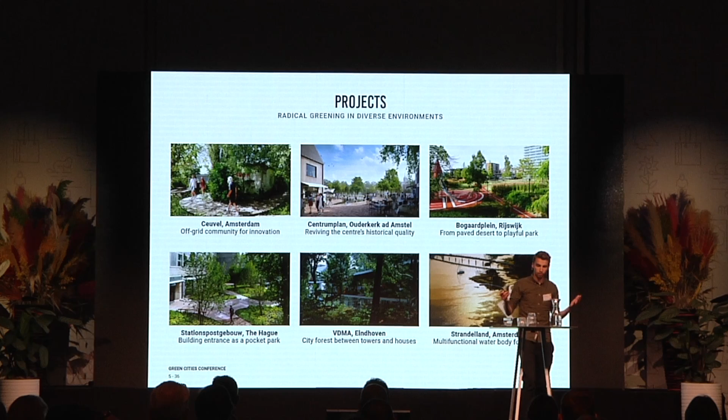We do this in a variety of scales, mostly in the Netherlands and Belgium, and we're exploring a bit further towards London and Germany. For instance, De Ceuvel, one of the first projects that we did, went a bit viral after it was executed, because the vegetation planted there also purifies the soil underneath. Since it was a former shipyard, it was very polluted. We're now in year 8 of that project, where Wageningen University and the University of Ghent are doing research on how much the soil pollution has been reduced since the start.

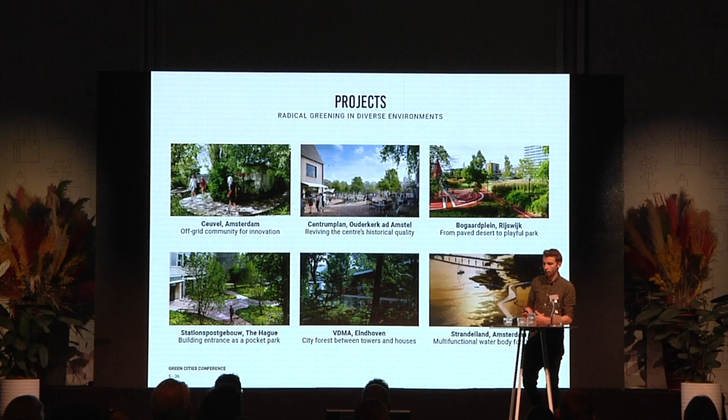Also in The Hague, the bottom left one, we made a very small pocket park, but with multi-layered planting, really a cooling spot in one of the most paved spaces of the city. And in Bogaardplein, on top, in Rijswijk, we try to really create a new city center, a social city center for play, for activity, for sports, for improving the physical health of the inhabitants within a park setting.

And as mentioned, because we try to tackle these assignments like this, we became Architect of the Year, which was a bit surprising because we're landscape architects by nature. It was a very nice celebration, but far more important, we think, it was also a sign that as a country, as a society, we're ready to really take green as the most important part and then do all the rest, or take green as a problem solver for all the other challenges that we're facing.

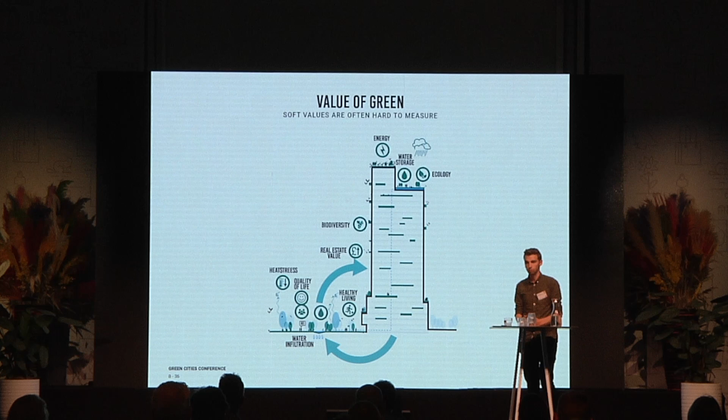And I think almost every speaker talked already about the value of green. We know it's super important, but the difficulty about it is that those values are quite soft, so they are difficult to measure. Today we saw some nice examples where it has been measured, which is really good, but we really need to start making and executing the examples that can also prove that it really works, that people can experience what effect green, water, and natural environment have on your life, on the quality of life, and also what effect it has, of course, on the biodiversity itself.

So the first one I want to present is a question that came to us, I think, almost 2 years ago, like, hey, we have this open landscape just southwest of Lisse, which is in the middle of the Bollenstreek, the tulip area in the Netherlands, and we want to build 450 houses in it. And we were like, just building 450 houses in a location which is not that well connected with public transportation and everything. If you see how the urban fabric looks on the right side, it's also not the type of neighborhoods that we should create anymore in the 21st century.

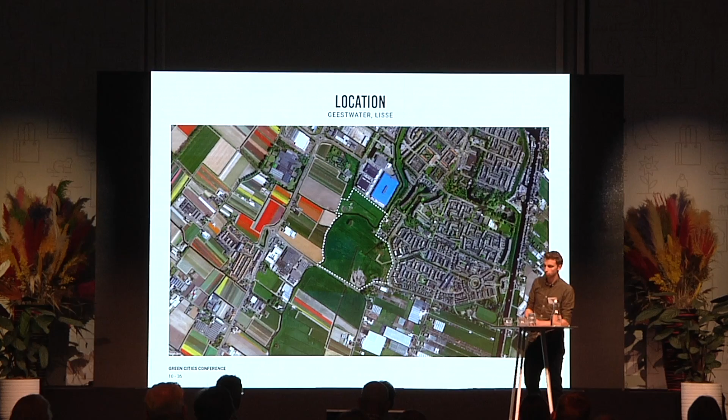So then we started looking at where the space came from, what the identity of the space used to be. And it turned out that it was actually a part of the Haarlemmermeer, which is now a big polder, but used to be a lake. It's the area where Schiphol, the big airport, is situated. And it had a bit of an extension towards our area. So it always used to be a wet area, a lake, a swamp later, and then later on a polder.

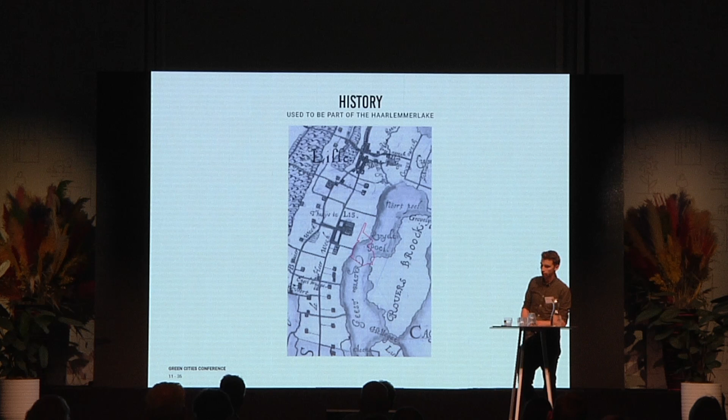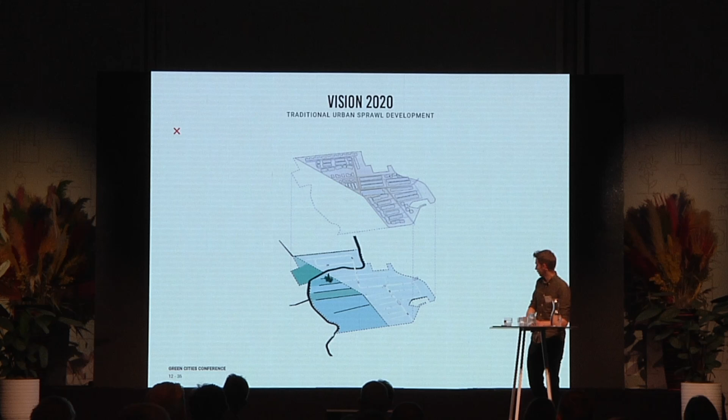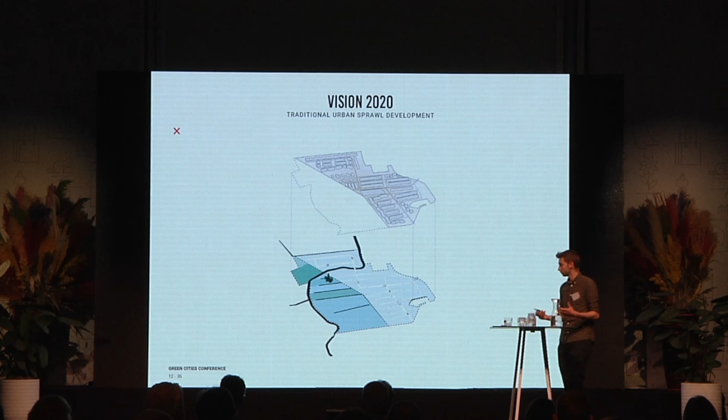And that inspired us to take this plan that was made already before, which we got, and we thought, this is not the way to go. You have a lot of streets. You have no interaction or very little interaction with green and nature. It also didn't consider the left part of the site, which we weren't allowed to build on, but just stayed like an open, grassy polder with very little value for biodiversity and nature.

And then we thought, let's transform it, and let's start from the soil, from the existing, from the history, and bring back that water landscape so that you get a very varied landscape and open space with wetlands, with more forested areas that also interact very strongly with the urban fabric that we designed. And by using some strategies, like not making huge individual gardens, but smaller gardens or outdoor terrace spaces, freeing up that space for a larger collective landscape, and stacking functions. So for instance, more apartments and less ground-mounted houses, but also sometimes parking underneath the built houses.

And maybe there are private developers in the audience, and they will think, shit, that's really expensive to do. It also is. So it was a huge challenge, but we also had ways of reducing the costs. For instance, by really minimizing the infrastructure. In the plan now, we have only 40% of road infrastructure. We don't have underground rainwater sewage because the water just flows off over the public realm towards the water landscape. And by making a very compact and intimate urban fabric, they also need to do less preloading and that kind of stuff. So that led to a plan with way more space for nature, for water, for recreation, and of course also for the quality of life.

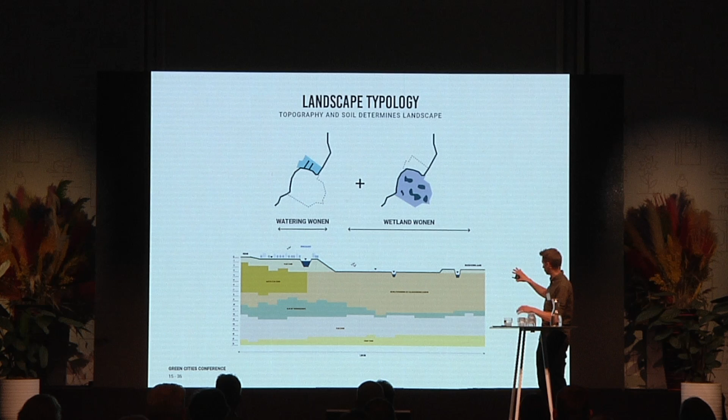And we have two different areas within the plan, because the right one was always part of the ancient, historical lake. The left one was never part of it, and that's also why it's way higher, and why it's also not part of the same polder structure. And therefore it also asked for a different approach.

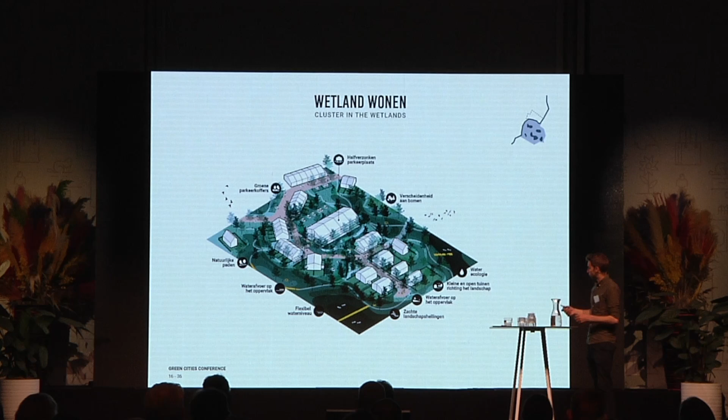So in the biggest zone, in the wetland living as we called it, you have these compact clusters where we made neighborhoods of between 40 and 60 houses, because that's a good mass or a good number where everyone knows the neighbor also. So it's also trying to enforce the social value. And then you see the blue-green fingers that surround actually this island almost completely.

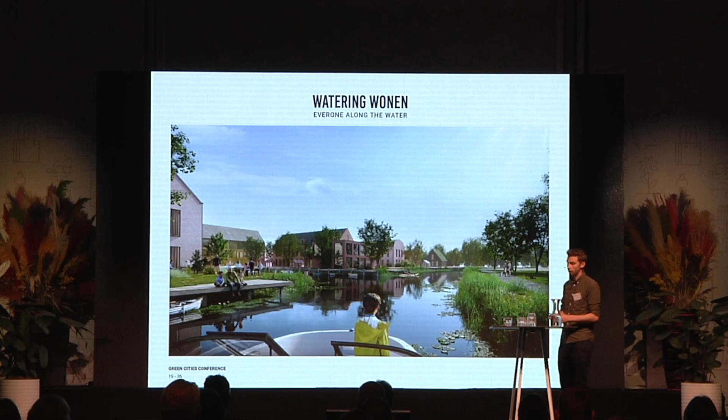And that's an image of how we hope, of course, it's gonna look in a few years. I think construction will start in an extra 2 years, so we're really now in the technical design phase to bring that further. On the northern part, we have a bit more of a traditional layout and setup. We also had to please the developers somehow, but still by extending the existing canal and waterway and softening the edges and everything, and also foreseeing the park zone on the south along the water.

There has been a huge investment and an extra increase in nature. And this is the plan, how it looks in total. So you see how these 450 homes, we have the same amount of housing here as there was in the traditional plan, but we have almost 12 hectares of extra water landscape as an added value.

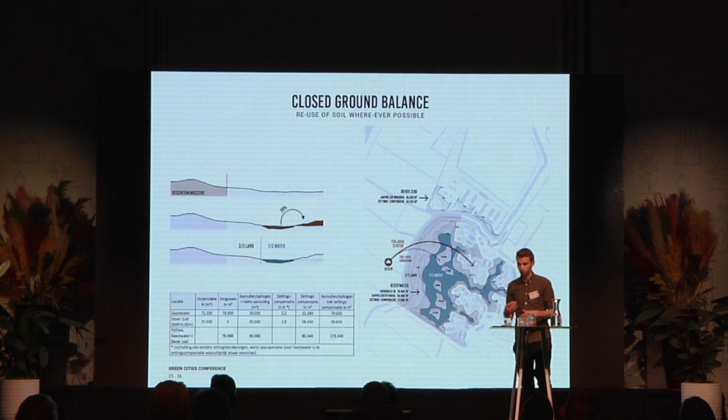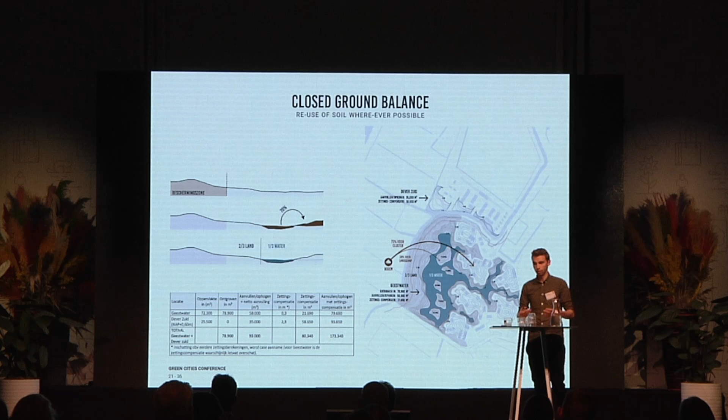And then, of course, you need to start working with engineers, with policymakers to also get this done. And also, it was not only about creating nature and creating a nice living environment, but also being very sustainable with how we deal with soil. For instance, that you don't have to excavate everything and then bring everything away and import new soil again. So that was calculated through.

We also talked with water authorities, because the water management in the Netherlands is very unnatural, actually. Often you have in the summer a higher water level than you have in winter. So we talked to them and we asked, can we turn this around? What should we do to do that? So we have an agreement that for this part we turn it around, which of course helps the nature flourish.

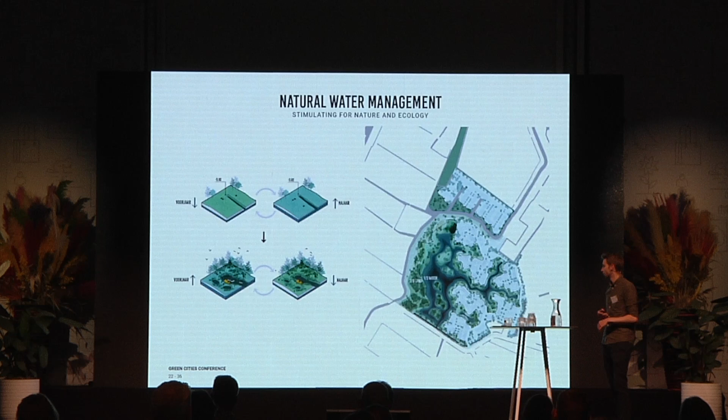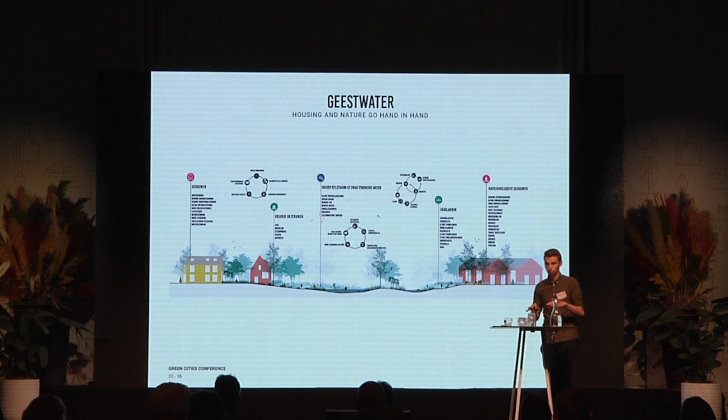And then with our ecologists, we looked at what species should we bring, where can we make habitats for animals to live, and how can we combine and connect all these different landscape qualities, the wetlands, the more forested areas, the grassy meadows, together, so that they form one ecosystem.

And so maybe as a summary, the fact that we need to do way less sand depletion because our clusters are way more compact, that we have less infrastructure, so less roads and not that underground water drainage and everything, and that we get a slightly higher revenue from some of the houses because they have such an amazing view over that landscape. We saved around 2 million euros.

So that money was invested in those more expensive strategies, like making smaller gardens, putting the parking underneath. But in general, that led to freeing up this space for 12 hectares of wetland landscape. And that's, of course, the big win of this whole project.

And then Middelkerke, it's along the Belgian coast. I'm originally also from Belgium, and I've spent a lot of summers along the coast. But it's not a coast that you can be very proud of as a Belgian, because somehow we managed during the 20th century to get rid of our whole dune landscape and all the dune formations and just pave them over, make a concrete dike, and build a huge line of apartments against it. The joke is that if sea level rises, Belgium will be protected by all the apartments standing on the dike.

And then there's one very specific building, the casino on the beach, and it has a small square in front, and it's really on the beach, so it's in front of that dike. And so there we got the question, hey, we're thinking of making a team with architects, and we also need a landscape architect to design the square. And we were like, the program of a casino is maybe also not the most socially inclusive program. The square in front, it's a nice assignment in general, but can't we do something more with it?

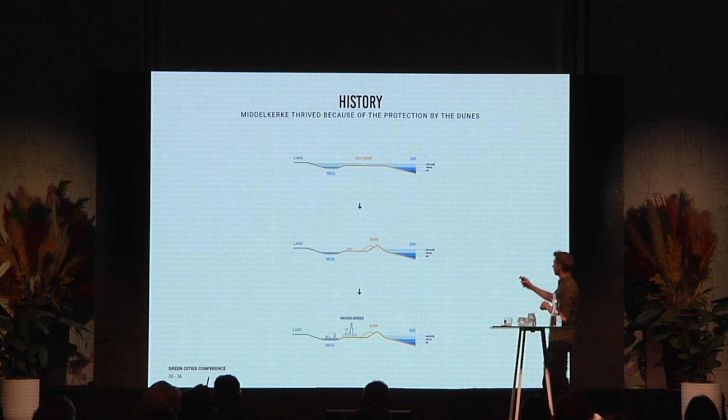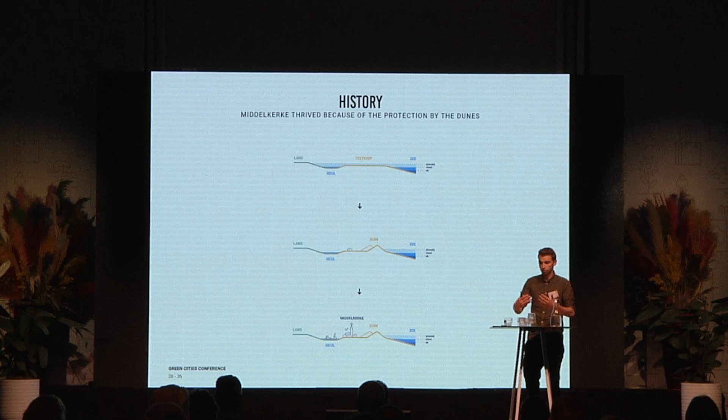And as you see through time, it was actually like one of the Wadden Islands in the north of the Netherlands. It was this very tidal area with this sand island that sometimes flooded over and sometimes not. And then during evolution, of course, a dune formation formed itself, and that made it possible that a settlement, like a fishers' village, emerged there, behind the dune formation, because it was protected from the sea. And that allowed Middelkerke to thrive and to become the village that it is today.

And then we thought, well, this casino is so much of a barrier between the sea and the land and the whole village. Can't we bring that back? Because there was also a question to reinforce the dike because sea levels are rising, can't we use this building that we need to make as a means to create more landscape, to bring that dune landscape back, but also to reinforce the dike at once?

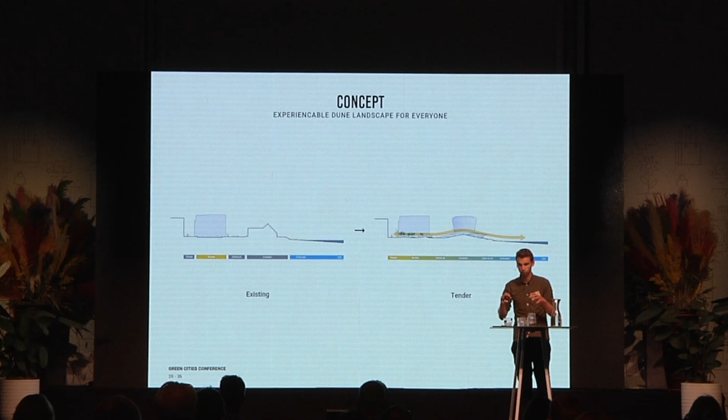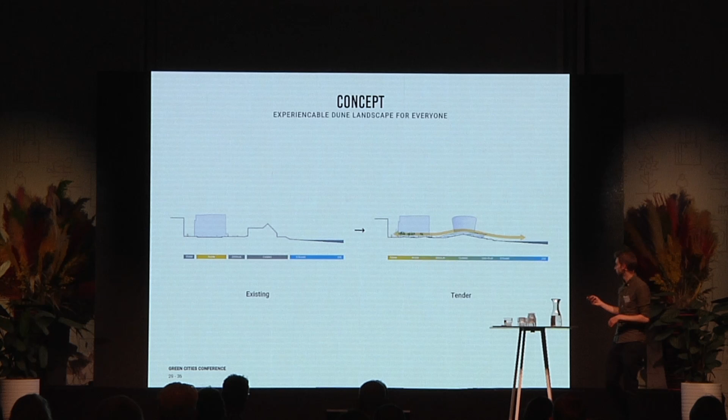So we learned from what was there, from the dune formation, and we proposed the building as a dune formation itself. The casino doesn't need that much daylight because you want to keep the people in and keep them playing. So we put it underground in the dike itself, and then draped the dune landscape over. And then there's a small circular volume on top, which is a hotel, and that did need daylight. But this is the ambition there.

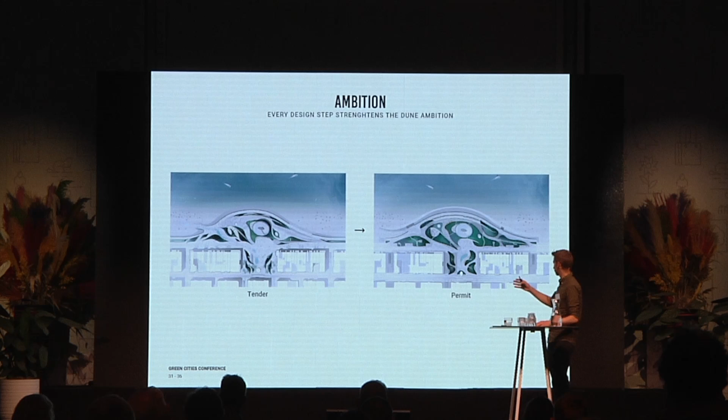So you see that the building is half sunken in, and you have actually a very slight, generous wave of dunes going over and bringing you to the beach and to the seaside. And from the tender proposal, which you see on the left, until the permit, which has been agreed upon right now, you see that this first ambition that we had was strengthened further and further. So every design decision that we made was actually to strengthen that initial idea of the dune landscape coming over, and to make it as strong and robust as possible.

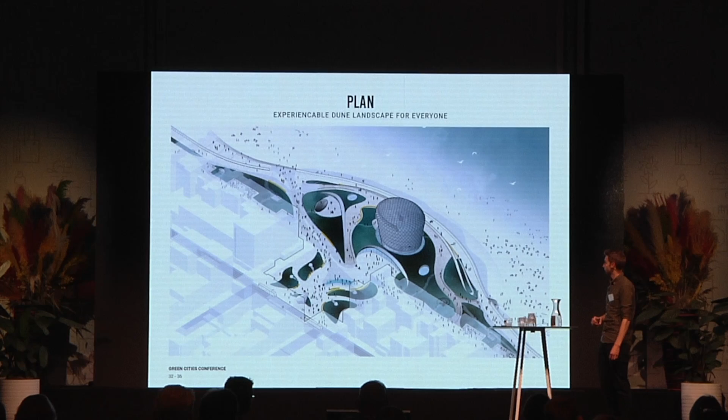This is in 3D how it looks. So when you enter from the square, you actually flow over, and the square is already waving a bit, has these different levels and topography, and then you can walk over the roofscape of the building, and then you can continue your way towards the beach.

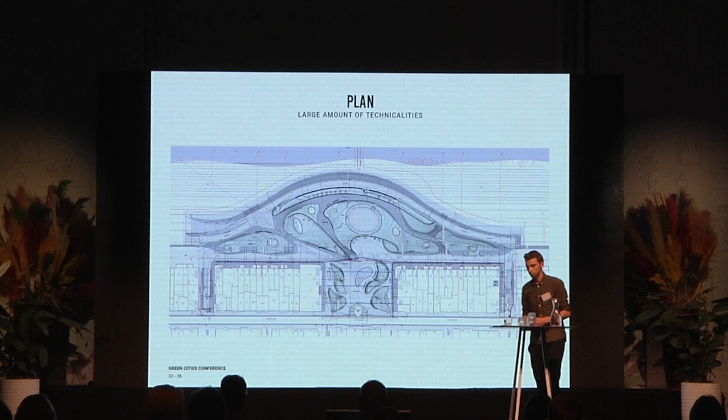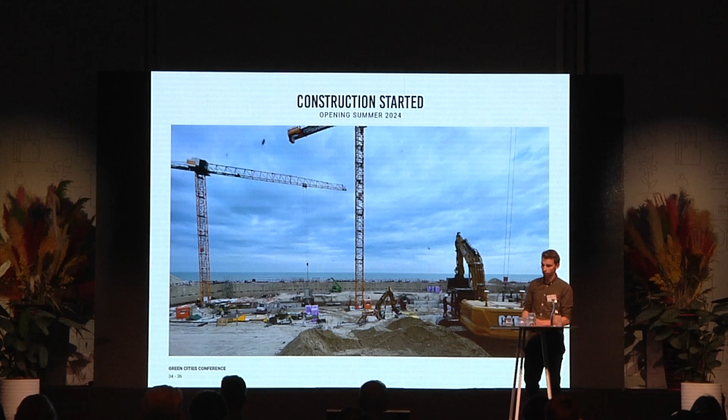And then you get a lot of challenges, because you're doing something which people don't know very well, which is not traditional, not standard. You are incorporating a building within a dike structure and then pulling a landscape over it. So we had tons of talks with municipalities and authorities and engineers and coastal defense government institutions. But in the end, the permit was agreed upon, and construction has started now. So they're working right now. The temporary sea defense is there. The dune landscape that will come over it will become the final sea defense.

And also there, I think what was really nice: when we submitted the tender and saw the other proposals, we actually received the highest points because of the spatial quality that we offered, because we didn't offer only 5,000 square meters of public space, but almost 25,000 square meters of public space. So it was a huge gift back to the municipality and to all the visitors who visit the Belgian coast in summer.

And we had the lowest construction cost, because we didn't need to make any facades, or way fewer facades than a traditional building on top of a square. We had to construct way fewer vertical elements, and also build way less high. So that was actually a win-win situation, where we combined these two elements together by using that landscape narrative and that landscape as a base, as a solution to this problem.

So in the end, we're going to make more than 1 hectare of green space, and there is now almost 2 hectares more of public realm for everyone to enjoy, to have those fantastic views over the sea, and to also reinstate a bit that historical landscape that Middelkerke was known for.